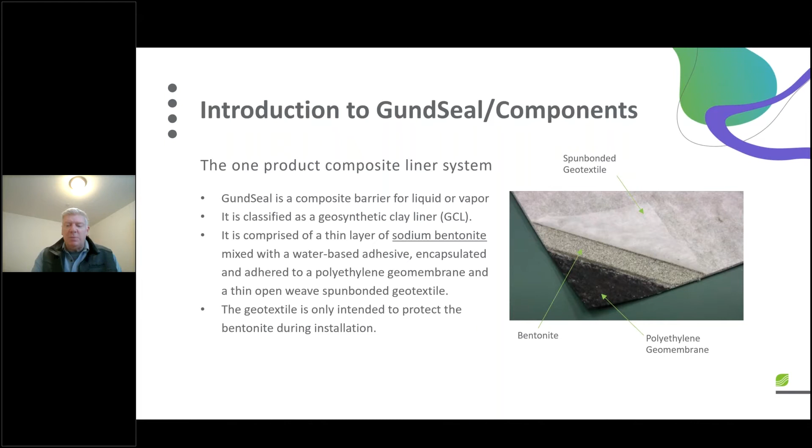geotextile. Now, the sodium bentonite, also known as montmorillonite, formed from volcanic ash many years ago, is used in a lot of different applications, makeup out of all things. But I personally like the material because of its permeability of 5 × 10⁻⁹. I also like its swelling capability, 10 to 15 times its original size, which is actually the main function of the sodium bentonite if exposed to moisture.

So one thing to take away from this with the GundSeal system, or even any GCL system, is that chemistry matters. We always want to know what the surrounding conditions are going to be, the type of leachate it's going to be exposed to, so that the system will be designed for that particular application. And we can do that through these modified bentonite systems. So just keep that in mind. Chemistry matters whenever you're working with this type of material.

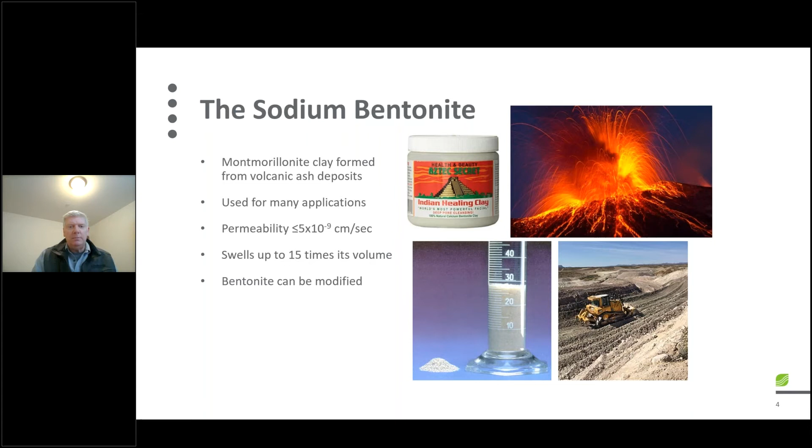Now, the geomembrane itself. One thing to note about this particular slide is that the GundSeal system uses an actual geomembrane as defined by the Geosynthetic Research Institute. It is not a laminate. Just keep that in mind. And the reason why I mention that is because I see other GCL manufacturers try to come in with a standard GCL with a laminate, when really what's needed is an actual geomembrane.

So if you encountered this, and I've encountered it a couple of times, don't fall for an imposter. Don't fall for a laminate. There's nothing wrong with laminate GCLs. We actually make them ourselves. However, the GundSeal system is very unique in that it is an actual geomembrane set forth by the GRI, as well as all the ASTM standards. So that's what sets GundSeal apart from just a standard GCL.

A question that I get regarding the system quite a bit is, how much is the weight? Tell me about the weight of the sodium bentonite per square foot. Well, there it is, 3/4 of a pound. The thing about the geomembrane is that we have a variety of either smooth or textured geomembranes that can be used with this system, as well as conductive.

We also have a variety of thicknesses that can be used to suit a particular application, anything from 20 to 80 mil. So when I talked about versatility of the GundSeal system, this is what I'm referring to. But once again, don't be fooled by a laminate imposter if your intention is to utilize a GundSeal system.

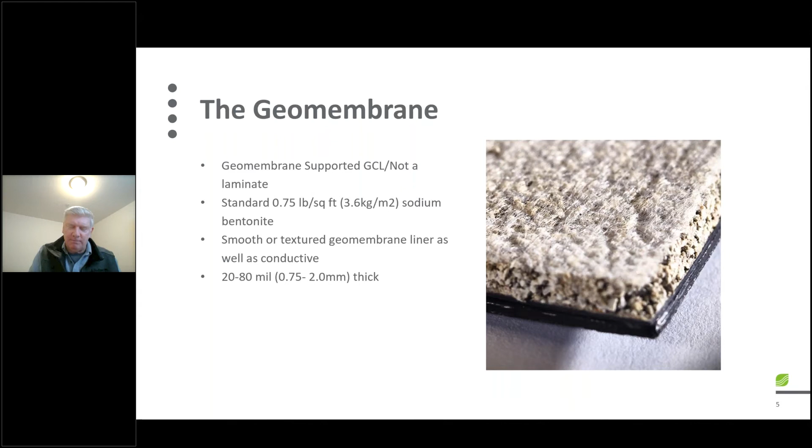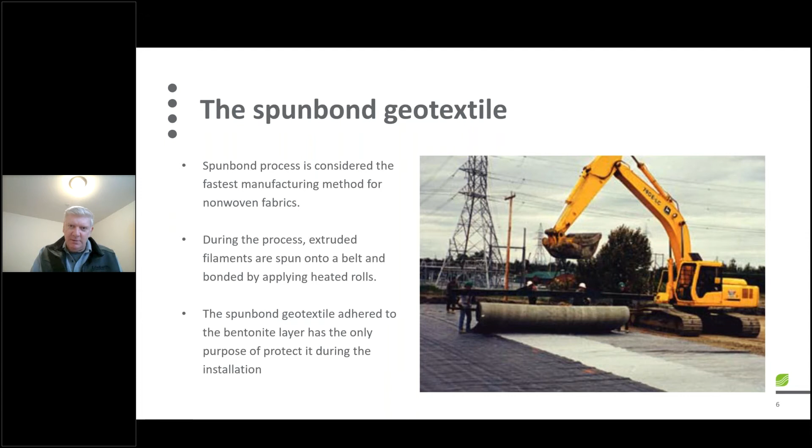The Spunbond geotextile is actually pretty vanilla. This material you can see in big box stores, the home improvement stores throughout North America. It's kind of that silvery material that sometimes you'll see for gardening purposes. In short, the Spunbond process is considered the fastest manufacturing method. During the process, extruded filaments are spun onto a heated belt, and then the textile is adhered to the bentonite layer. And once again, the function of the Spunbond geotextile in the GundSeal system is strictly to protect the sodium bentonite.

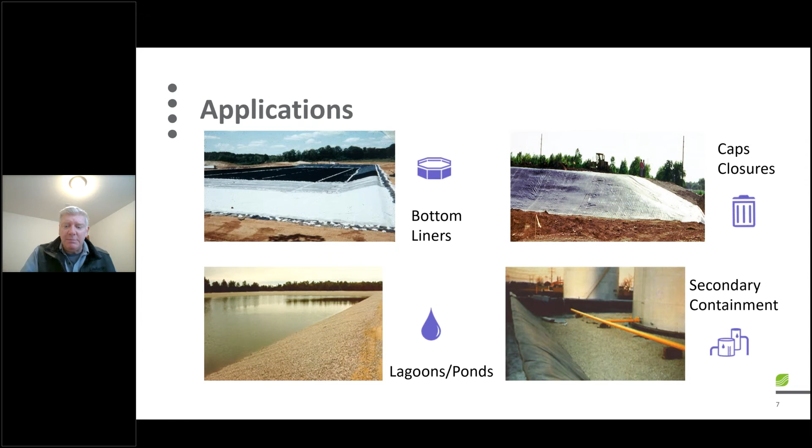As far as different applications, you're going to hear me harp on this, the different applications that GundSeal can be used. I've seen it used everything from bottom liners to caps and closures. We're going to focus on the caps and closure portion in a minute. Lagoon ponds, secondary containment. I've seen it used within power plants for processed water, ash repositories, as well as secondary containment applications.

When I come back and I mention the chemistry matters, where I see that is basically in mining applications as well as landfill applications, because I really do want to know what the leachate is comprised of, so that we don't have any adverse effects with the sodium bentonite. And I find that in mining in particular, with heap leach pads, solution ponds, and reclamation and closures, which makes sense considering it's pretty caustic material on those sites.

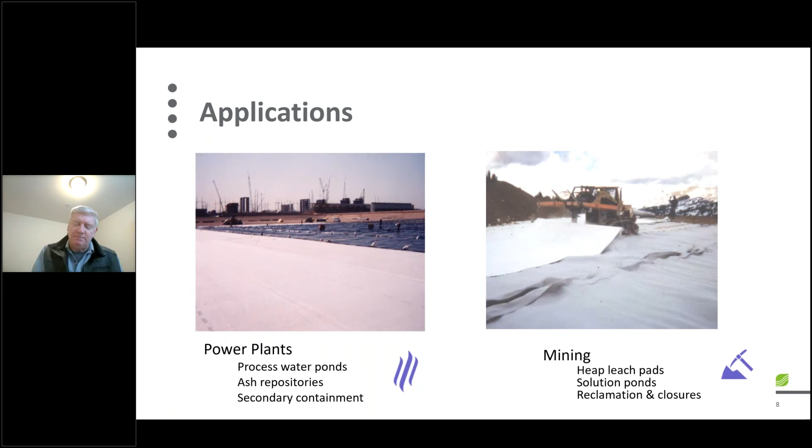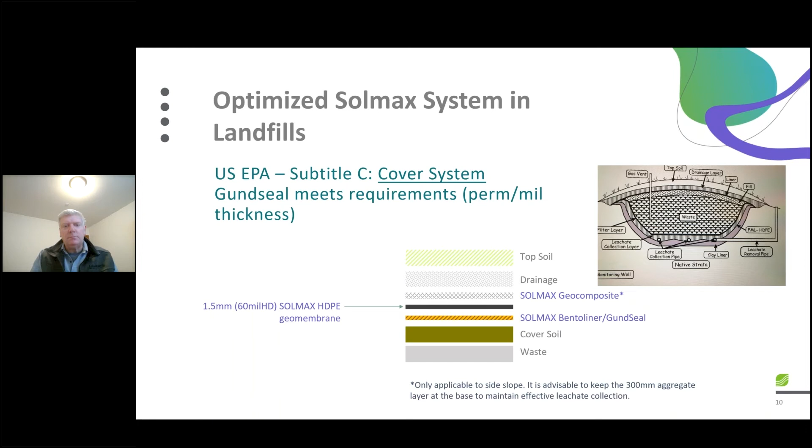And then you would have your drainage layer and then your topsoil on top of that for a subtitle C cover system. Make sense? So very versatile, and I wanted to focus on landfill specifically because that's where I see a lot of GundSeal systems used. Let's focus on a couple of the GundSeal solutions and how it actually might help you and your client in today's real world.

Now, one thing that I've noticed is I still see a lot of projects with these compacted clay liners. Nothing wrong with them. I'm sure they have their place in some locations, especially where clay is readily available and cheap. But in a lot of cases, you won't have that luxury. For those of you that aren't familiar with a compacted clay liner, consider it a mineral hydraulic barrier that's basically laid down in various thicknesses. Generally, minimum thickness of roughly 12 inches or so, and that's the bare minimum. So they haul in this clay material with trucks, and then they lay them down in these different layers, generally 12 inches.

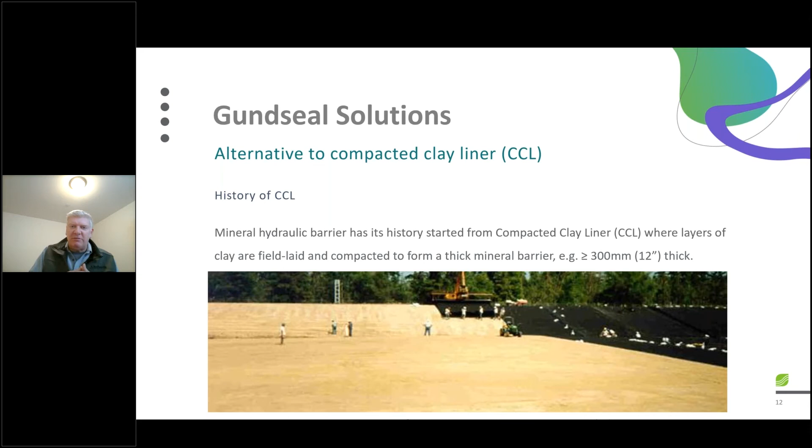The thing to keep in mind with these compacted clay liners is that there are a lot of variables in construction that you do have to keep tabs on. Things like the moisture content of the material. Tell me about the compaction effort, the type of machine used in the compaction, number of passes, the type of wheel, etc. Tell me about the thickness of the lifts. Has that been consistent? What's the consistency of the material? Is it all coming from the same site? Weather variables come into play, such as temperature and humidity, solar intensity.

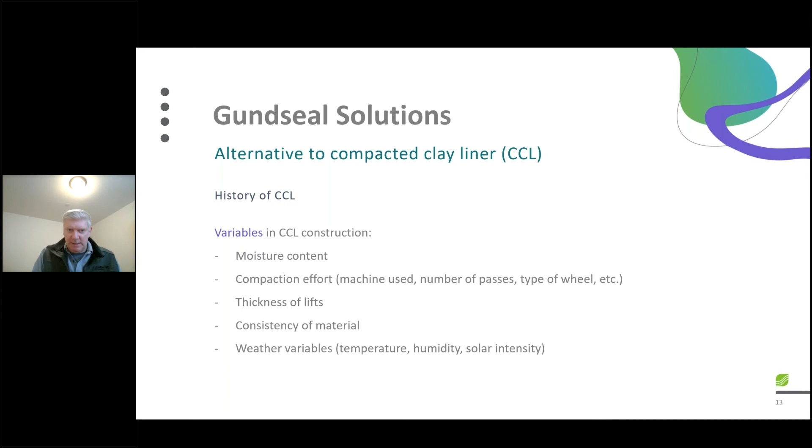Also, some of the disadvantages of utilizing the compacted clay liner is that it's slow and complicated to construct. Desiccation can occur during construction. It's difficult to self-heal when it's exposed to various weather conditions. Tell me about the availability. Do they have enough at the quarry to actually provide for your project? It also requires, in my opinion, a complex CQA process, and it requires a lot of knowledge of the soil, and it puts an extreme burden on the contractor and the engineering community as well to keep tabs in order to have a very effective clay liner CCL system.

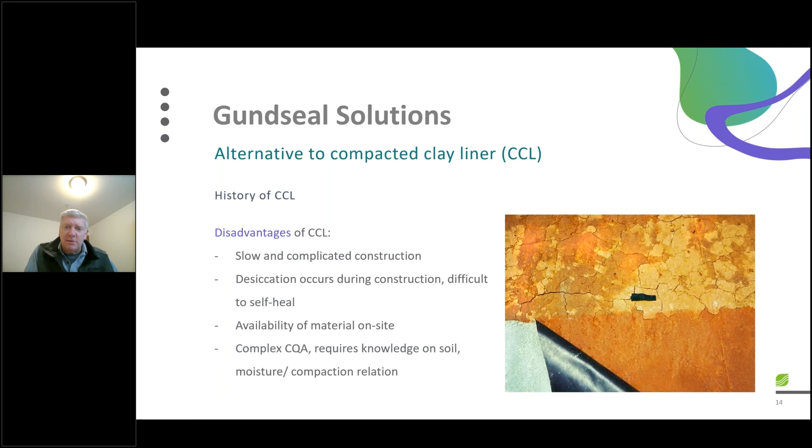It couldn't be more different when it comes to our GundSeal system, or our GCLs for that matter. It really does relieve the burden on the engineer and on the contractor, especially when it comes to quality control. Solmax follows a very strict CQA process when it comes to our manufacturing, and you always have our specification sheets to refer to. So in short, what you see is what you get, right? So this will give you better peace of mind, and you actually know what you're getting. Why not erase all of the tedious efforts with a compacted clay liner, not including possible human errors, machine problems, environmental influences that can come into play? The GundSeal system basically eliminates any of the potential worry of a compacted clay liner.

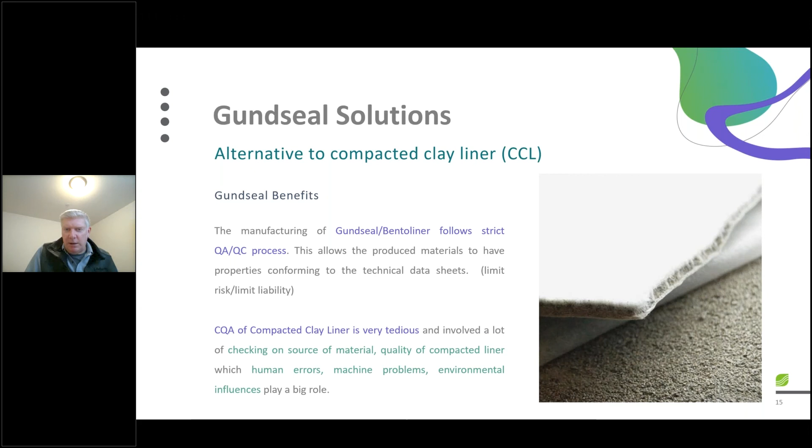For example, if you have a landfill that's 50,000 square meters, which is roughly 60,000 square yards or so, if you can reduce the CCL from 300 millimeters, which is about a foot, which is a very thin section, they're generally thicker than that, the additional volume height would be 295 millimeters, because the thickness of the GundSeal is no more than 5 millimeters thick. It's very thin. You would have at least 14,500 cubic meters of additional volume.

Now, what does that mean? What that means to the owner is that if they have more volume, they can accept more refuse or more waste, and then they can make more profit. So it's systems like this that resonate with the owners. And it's something that, to me, has always hit home with them. So once they start crunching the numbers, and once they realize that they can actually make more profit by optimizing their section, that's when you get their attention.

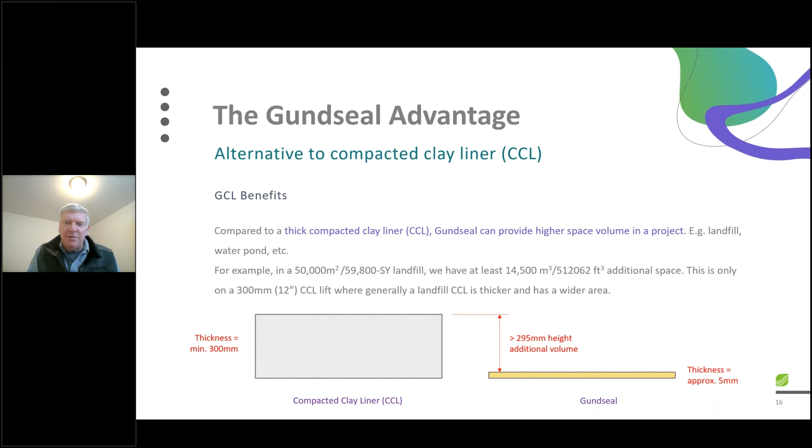Still focusing on the GundSeal advantages, a couple other notes that I've experienced that have actually made my life a little easier when utilizing GundSeal is that it has very excellent layflat properties. What does that mean? That might not mean much to you, or to myself, but it does mean a lot to the installer. Typical high-density polyethylene systems, which are proven systems, wrinkles can be a problem.

The thing about GundSeal is that because of its excellent layflat characteristics, when the installer is welding it, they really don't have to worry about a significant amount of wrinkles within the system. And so it just makes the process go a lot easier. It makes CQA go a lot easier, because every time they start welding a wrinkle, they have to question themselves. So the flatter the system lays, the easier the installation will go, and hence the quicker everything will proceed without delay. And so because of that, you'll have less potential for leakage, and it also increases the windows for installation.

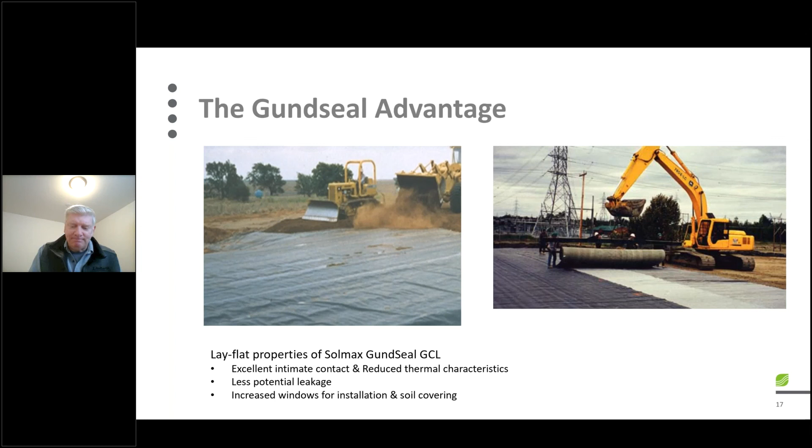You know, the funny thing is, none of this really matters, though, if you don't have the tools to make an educated decision as to whether or not GundSeal is an appropriate system for you. So that's the reason why we're able to provide you with some tools that to me are pretty important. Namely, starting from left to right, we have the GundSeal design manual.

And one thing I can tell you, for the insomniacs out in the audience, if you have any problems falling asleep, just crack this manual open. It might help you. It might help you.

The thing to note about this particular design manual is that if you look at the caption on the lower left, you'll see co-authors to this manual. And for those of you that have been in the geosynthetic world for any length of time, you're going to see some familiar names. Some real heavy hitters within the geosynthetic industry, their knowledge has gone into this design manual. So pretty much any condition that you can encounter, it's been addressed in this manual. And once again, it's just meant to give you peace of mind in order to have an informed and educated decision.

We also have our quality assurance installation manual. This manual is geared more towards the installation contractor. The funny thing is, a lot of the installers out there have installed GundSeal in the past, so they're relatively familiar with the system, and they know how to put it down reliably. However, if they needed a quick reference regarding a specific detail, that's what this manual is geared towards. And wrapping things up when it comes to the tools, we can supply you with CAD drawings or any type of drawing for virtually any situation that you would encounter on a GundSeal application.

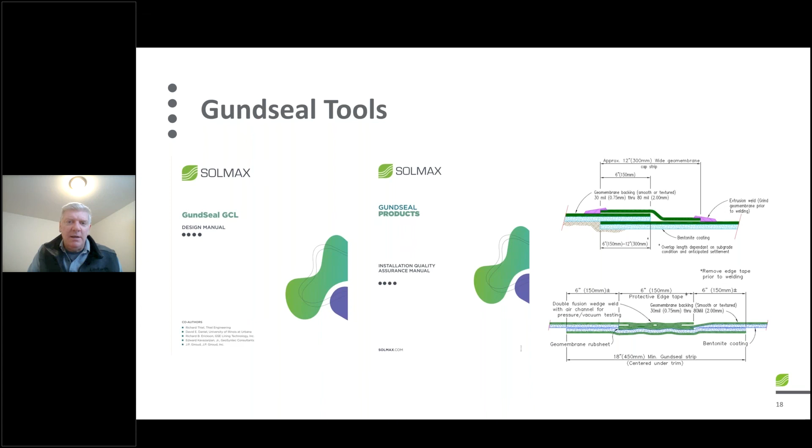So just wrapping up here, as far as the GundSeal advantages, it really does offer the best leak protection, mainly because it's two systems in one. As I had mentioned, it's a geomembrane system, a true geomembrane system, not a laminate, along with a geosynthetic clay liner. Short installation time, 1 component as opposed to 2. I like that efficiency. So does the owner, and so do the contractors that install the material. It's going to increase your hydraulic performance, high seam lap integrity. You have the option of welding the material or not welding the material. Also, ease of installation, and once again, the cost savings through a single product install. It goes a long way.

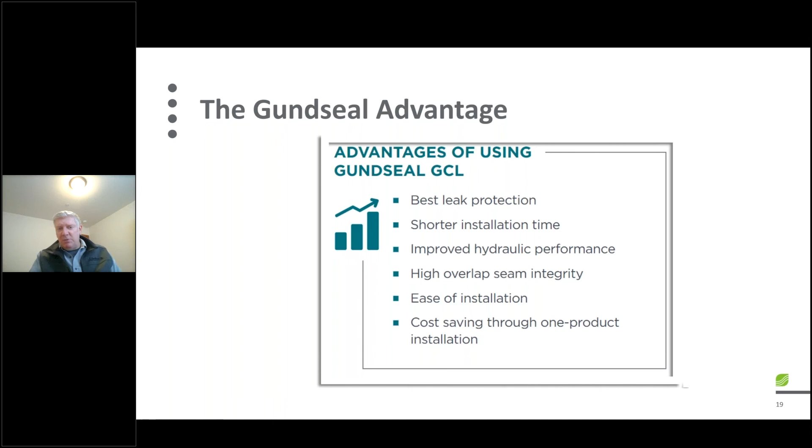Now, I realize I may have gone through some of these slides quickly. However, I only had about 30 minutes or so to present. I think I have roughly 10 minutes to take questions.